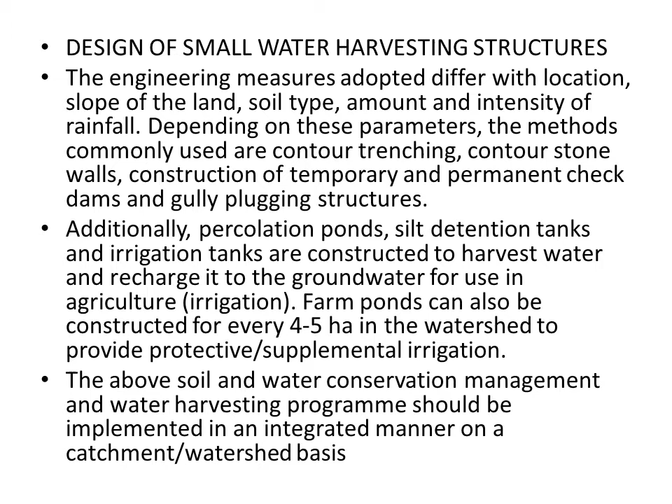Functions of the structures: contour bunds, contour barriers, contour trenches, and contour stone walls will not only prevent soil erosion but also obstruct the flow of runoff water. Consequently, the obstructed water will increase the soil moisture and recharge the groundwater in the area.

Check dams may be temporary structures constructed with locally available materials. The various types are brushwood dam, loose rock dam, and woven wire dam. The main function of the check dam is to impede the soil and water removed from the watershed. This structure is cheap but lasts about 2 to 5 years. The cost of the structure depends on the materials used, the size of the gully, and the height of the dam.

We can go for contour bunds, contour barriers, trenches, and contour stone walls to arrest soil erosion as well as the flow of runoff water, and consequently increase the soil moisture and recharge the groundwater. Check dams may be temporary structures like brushwood dam, loose rock dam, and woven wire dam. These are cheap but last only about 2 to 5 years.

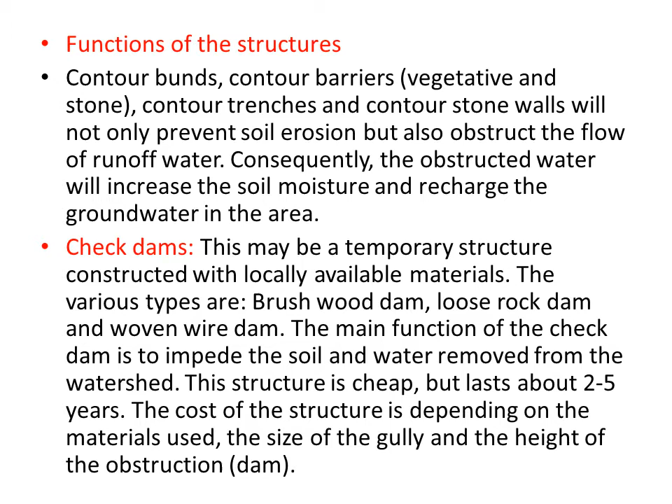A permanent check dam can be constructed using stones, bricks, and cement. Small earthwork is also needed on both sides. Cost varies depending upon the length and height of the dam. A little water is also stored above the dam, and this water recharges the groundwater. So we can go for permanent structures using stones, bricks, and cement, and the cost also varies depending upon the length and height of the dam.

The percolation pond is a multi-purpose conservation structure depending on its location and size. It stores water for livestock and recharges the groundwater. We can go for percolation ponds, which have multiple purposes: water can be stored for livestock as well as to recharge the groundwater. It is constructed by excavating a depression to form a small reservoir, or by constructing an embankment in a natural ravine or gully to form an impounded type of reservoir. So you can build it across a gully or a nala by putting an embankment to store the water.

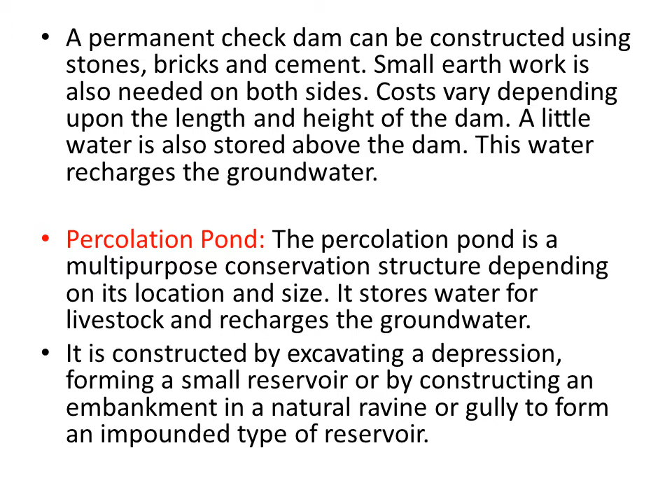Irrigation tank: the main function of this storage structure is irrigating crops. In Tamil Nadu, India, each tank irrigates from 10 to 5,000 hectares. In South India, there are about 20 lakh tanks irrigating about 3.5 million hectares. Earthen bunds are reinforced with masonry to collect and store rainwater for irrigation. The cost of this tank depends upon the size, location, and site conditions. Water from the tanks is normally used to grow paddy crops. So irrigation tanks are meant mainly for agriculture purposes, and in South India we have about 20 lakh such tanks irrigating about 3.5 million hectares. The cost of these structures depends upon the size, location, and site condition. They are constructed with earthen bunds reinforced with masonry to collect the water.

Apart from the above, to increase moisture availability to agriculture and tree crops, in situ moisture conservation techniques must be adopted in addition to the large-scale soil and moisture conservation and water harvesting structures in the watershed. We can also take up other techniques to increase the moisture of the soil, going for some small structures for agriculture purposes apart from construction of these large irrigation and percolation tanks.

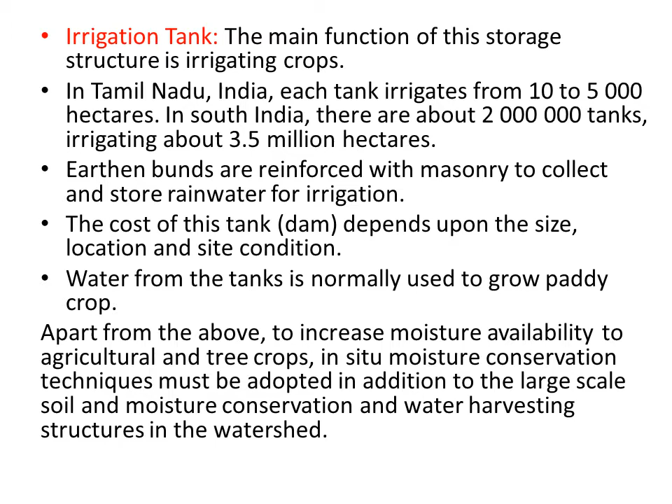These storage facilities and structures will attenuate and reduce the flood flow during storms. These measures will also ensure soil moisture and growth of trees downstream, recharging the groundwater in the region and making available more water for drinking and irrigation purposes.

Construction procedures: the procedure for the construction of tanks and check dams on a watershed basis involves first making detailed studies of the watershed to determine its current erosion condition, land use, and water balance condition before taking up the project.

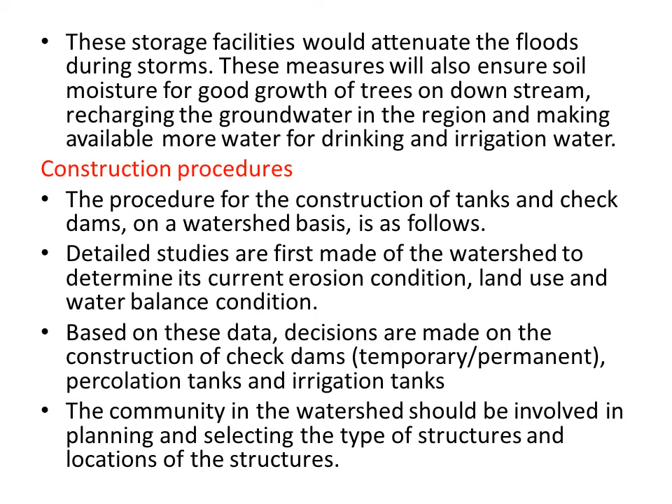If a large quantity of water is lost through runoff from the watershed, two to three percolation tanks or one irrigation tank can be planned based on the water availability.

A number of check dams can be provided to arrest erosion and to plug the gullies in the rivulets at appropriate places, or a series of check dams on the nala or gully can be constructed.

Construction can be done using human labor if necessary, or by a mix of mechanical and human effort. In India, these works are mostly executed by laborers to give employment to village people, with only 10% of the work done mechanically for digging foundations and excavating earth to form bunds. Otherwise, 80 to 90% of the work can be done by machines if employment is not a criterion.

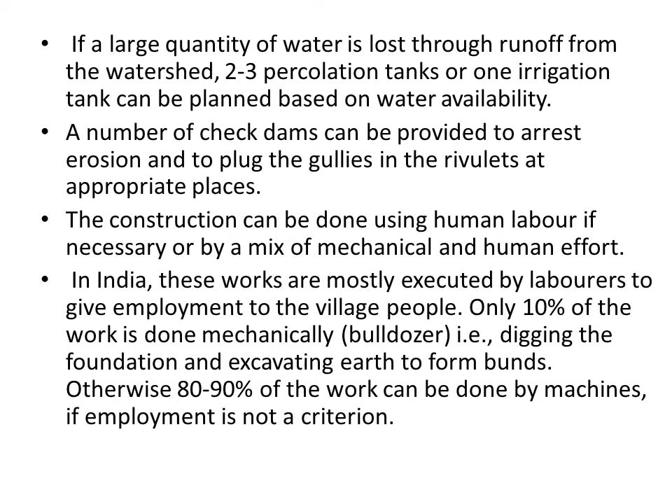Planning concept, design and construction of these structures: when selecting the construction site of check dams, percolation ponds and tanks, the following criteria can be considered.

Check dams are constructed across rivulets and gullies to control erosion, prevent gully formation, and arrest the flow of water to allow it to go underground. A number of such obstructions will be useful for soil and moisture conservation measures.

Inexpensive temporary structures can be constructed using vegetation, stone or brushwood available at the site. Large numbers can be provided to reduce erosion and gully formation. Permanent check dams can be located at the junction of one or two streams or gullies using masonry structures.

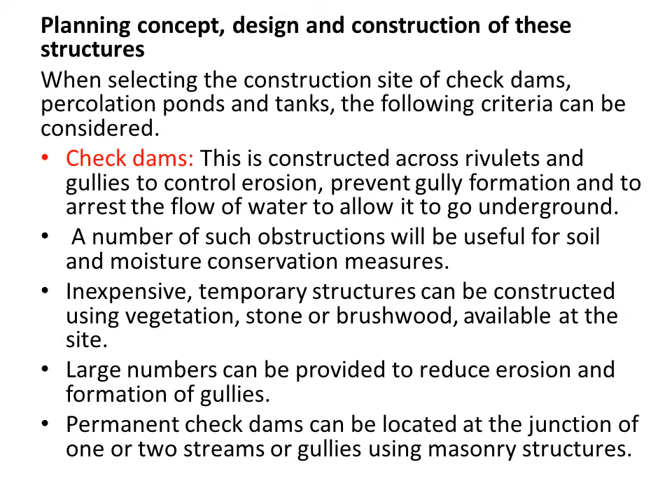For percolation ponds, the following factors may be considered: they should not be located on heavy soils or soils with impervious strata; the topsoil should be porous. Percolation tanks and ponds are meant for percolating water to recharge the groundwater or increase soil moisture, hence they should not be located on heavy soils or impervious strata.

Suitable and adequate soil should be available for forming embankments. The ideal location of a pond will be a narrow stream with high ground on either side, meaning a good valley-like location with a narrow stream. A simple, economic and efficient surplus arrangement should be possible.

When there is an excess flow, it should be taken out efficiently by providing waste-way structures or spillway-like structures. Pond size should be decided on the basis of the catchment area and the number of fillings possible for the pond, using the available water and the size of the catchment area.

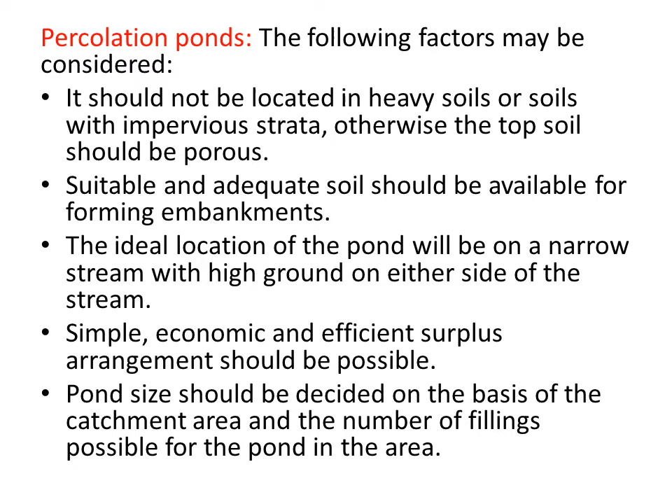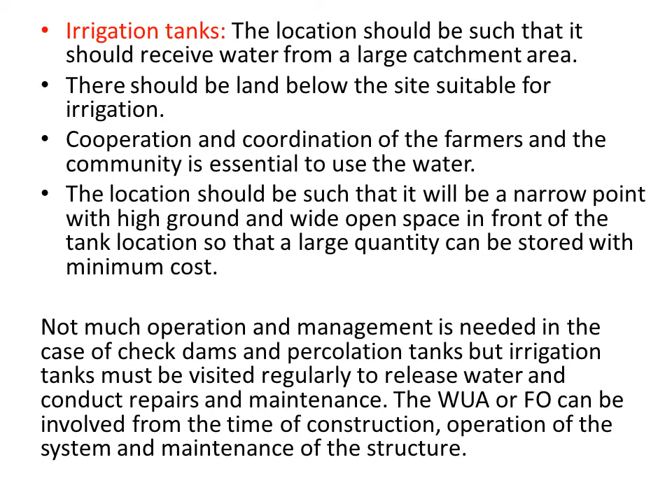We will go through examples of design of check dams, percolation ponds and tanks. The design procedure for the check dam, percolation tank and irrigation tank is more or less the same. In all three cases, the weir length has to be designed or calculated. So the design criteria for check dams, percolation tanks or irrigation tanks is almost the same.

We need to design a waste weir or surplus weir to carry out the excess water. In the case of percolation tanks and irrigation tanks, the capacity of the tank has to be calculated based on the rainfall and catchment area of the tank. For check dams, this is not necessary. For percolation and irrigation tanks, there is a need to work out the capacity based on the rainfall and the catchment area.

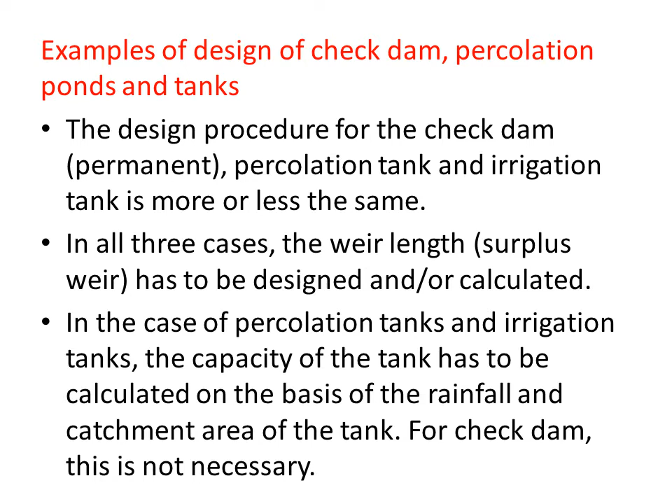The method of calculating the weir length and the capacity are the same in all cases. The procedure is as follows: select the site for the tank or check dam. Using the topo sheet or village map, find out the correct catchment area of the watershed at the location. Take the cross sections and longitudinal sections of the stream or gully where the tank or dam is constructed. Based on the levels taken, prepare a 50 centimeter contour for sufficient area to decide the water spread area and the capacity of the tank based on the yield of the watershed.

So the procedure involves identifying the location of the tank or check dam. Then, using the topo sheets, you find out the catchment area. Then you survey the cross sections and longitudinal sections to decide the capacity of the tank. You can go for 50 centimeter contours of that area to decide the water spread area and the capacity of the tank.

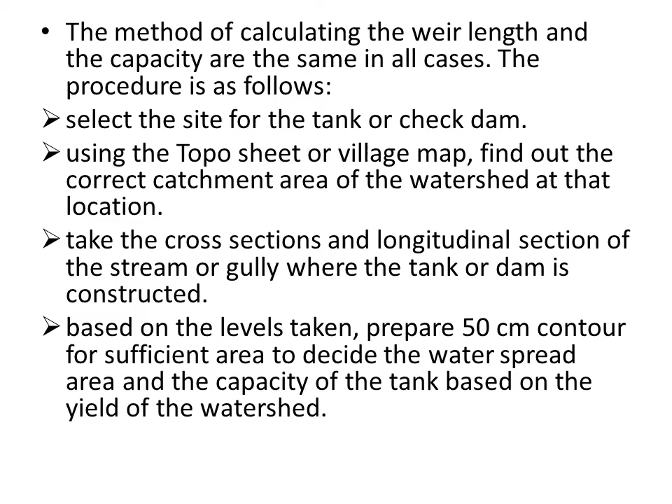We shall go through an example of a catchment area of 40 hectares where there is a rainfall of 625 millimeters, and the yield from the catchment, assuming the catchment is good, based on the tables available, can be calculated as 51,480 cubic meters of water runoff. Capacity may be designed as one third of the yield from the catchment, that is 17,000 cubic meters. So you have to design a structure to hold 17,000 cubic meters of water.

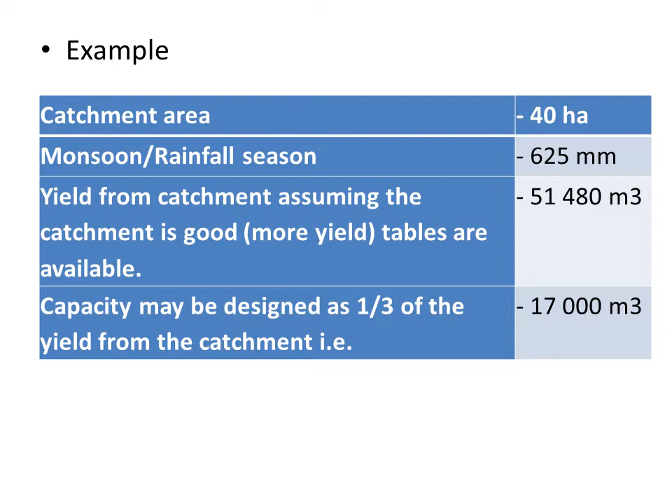Deciding the full tank level (FTL), maximum water level and tank bund level: from the levels taken, draw the contour lines at every 50 cm interval between the bed level and the highest ground level at the site. From these contour lines, the capacity of the tank at 0.5 meter, 1 meter, 1.5 meter and 2 meter height above the bed level is calculated. So we have to draw a contour map at 50 centimeter intervals from the lowest bed level to the bank level, and decide the capacity between the 0.5, 1, 1.5 and 2 meter level contours.

The contour at which the tank can store one third of 51,400 cubic meters, that is 17,000 cubic meters, is the required height for the weir. This is calculated as the full tank level. So we have to decide the full tank level, going by the one third capacity of 51,400 cubic meters, that is 17,000 cubic meters of water to be stored, and fix the contour level of the tank that can hold this water. This is called the full tank level.

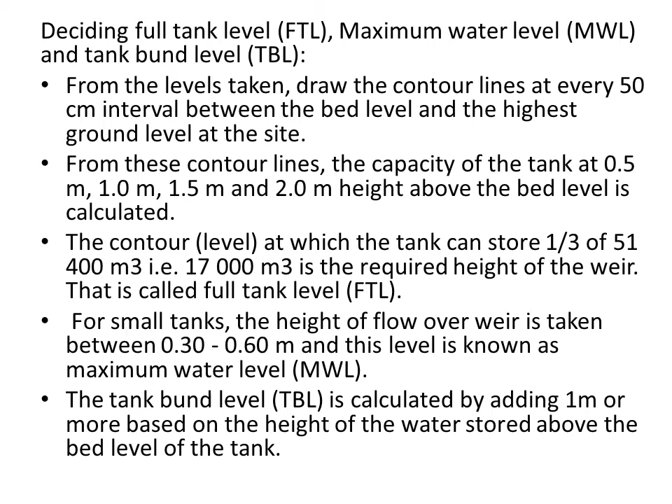So design of the weir, it is a waste weir. You calculate the maximum discharge in that nala or river portion using an empirical formula Q equal to CIA by 360, where Q is the discharge in cumecs, I is the intensity of rainfall in millimeter per hour, and A is the area of catchment in hectares, and C is a coefficient.

To decide the length of the weir, the formula used is Q equal to CL into H to the power 3 by 2, or which is 1.67 L into H to the power 3 by 2. For the broad-crested weir, C is 1.67.

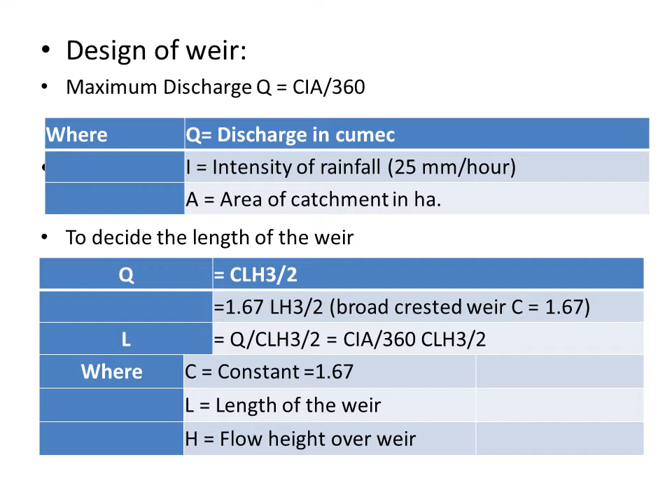Using this formula, you can find the length of the weir, L equal to Q by CL into H to the power 3 by 2, where C is a constant used as 1.67, L is the length of the weir, and H is the flow height over the weir, which is taken as 0.3 to 0.6 meter.

Farm ponds. Rain-fed agriculture constitutes over 55% of the net sown area in the country. The annual average rainfall of the country varies from 400 millimeter to more than 2000 millimeter, varying both in space and time. In low to medium rain-fed regions, the occurrence of high intense rainfall events with short duration is very common, causing soil erosion.

Basically, about 55% of the sown area in our country depends on rainfall, that is, rain-fed agriculture systems, and the rainfall varies from 400 to more than 2000 millimeter, varying both spatially and temporally. In low to medium rain-fed regions, high intense rainfall occurs in a very short duration, causing soil erosion. Hence, efficient rainwater management is necessary to improve water productivity and protect the natural resource base in rain-fed regions.

In such areas, it is very essential to have efficient water management and to improve water productivity and protect the natural resource. Farm pond technology has very good potential for implementation in different schemes of states or central government. Farm pond is the most important and promising technology in the integrated watershed management program, with other environmental benefits.

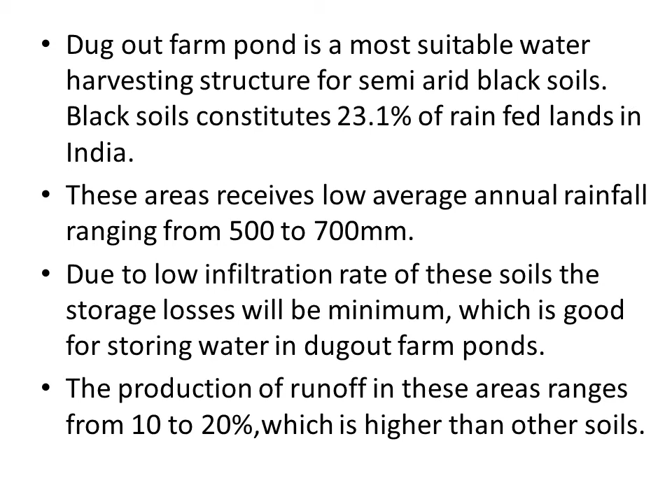Types of farm ponds: based on the method of construction and their suitability to different topographic conditions, there are three types of farm ponds. They are excavated farm ponds for flat topography, excavated-cum-embankment ponds for mild sloping topography, and embankment farm ponds for hilly and rugged terrain.

In black soil regions with flat to mild sloping topography, generally excavated type ponds are more suitable. So we have three different types of farm ponds depending on topographical conditions. Excavated farm ponds are for flat topography, where the ground is very flat you can go for excavated farm pond. Excavated-cum-embankment ponds are for mild sloping topography, and embankment farm ponds are for hilly and rugged terrain.

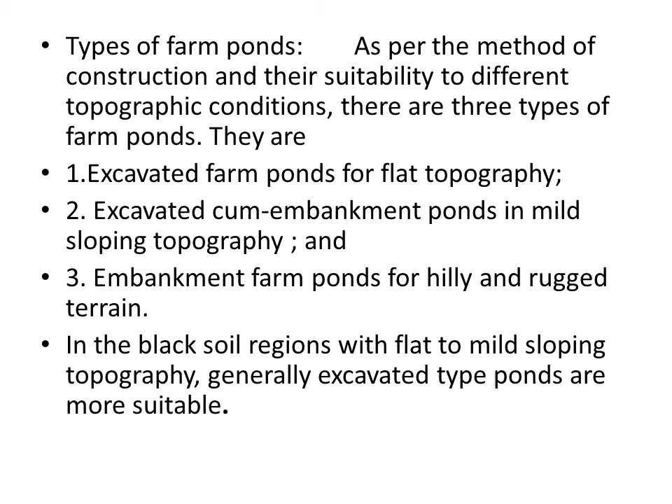Selection of site: the selection of site in a participatory mode depends on availability of a suitable site for pond location, farmers' willingness to part with a portion of land for pond construction and to share harvested water with neighbors, and optimum catchment size for considerable storage ensuring a long period.

These dugout type farm ponds involve the participation of the farmers because we have to choose or locate a suitable site for the pond location, and the farmer should have willingness to part from their land for construction purposes, as well as share the harvested water with others.

Well protected catchment for arresting rapid siltation. The catchment area should be well protected to arrest rapid siltation, so it should not get eroded. For that purpose, it should be protected with some vegetation cover or plantation of trees, etc.

While deciding the capacity, conservation measures such as agronomical and mechanical measures are considered. The command area near the pond should be free from salinity and alkalinity, and the site should require little or no land shaping around the pond, so one should not have to go for land shaping processes around the pond.

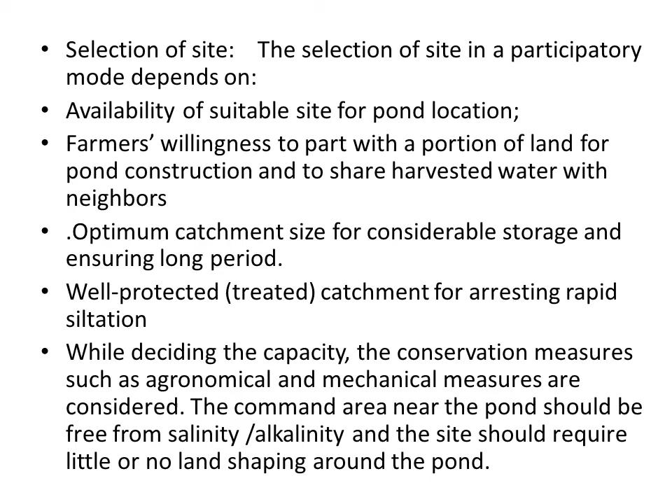Selection of the site for farm pond depends on local soil conditions, topography of the area, drainage capacity, infiltration, rainfall pattern, and distribution. Selecting the suitable site is considered one of the most important steps in planning for farm ponds. The following points may be considered for site selection within the farm area, with participation of the farmers to locate the farm pond site.

The following points are to be considered while selecting the site for dugout ponds. Observe the average slope direction in the farm area in which the farm pond is to be planned for construction.

If the slope is towards the left bottom corner of the field, a farm pond must be constructed in the left corner of the plot.

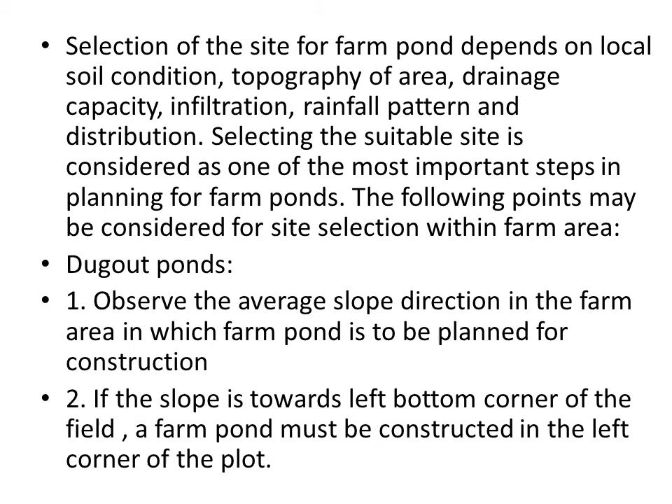If the slope is towards the bottom right corner of the field, a farm pond must be constructed in the right hand corner.

If the slope is towards the bottom of the field, a farm pond must be constructed at the corner of either side with a proper field channel at the bottom of the field connecting to the inlet of the structure, guiding water to the structure.

If the farm area has multiple slopes in different directions, a farm pond must be located in a portion of the area where water drains into the structure, possibly at the center of the field or near it, to suitably collect the water.

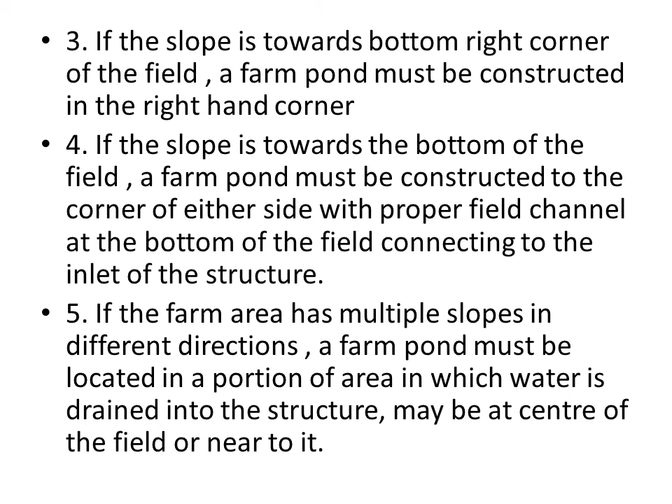For construction of a farm pond, the soil must have low hydraulic conductivity with minimum seepage and percolation so that water can be retained for a longer time in the farm pond.

Soils with low infiltration rate are most suitable for construction of ponds. Table 2 shows the infiltration rate for different soils. Black soil has good potential for rainwater harvesting without lining, as seepage losses are minimum, since black soils do not need lining to arrest seepage losses.

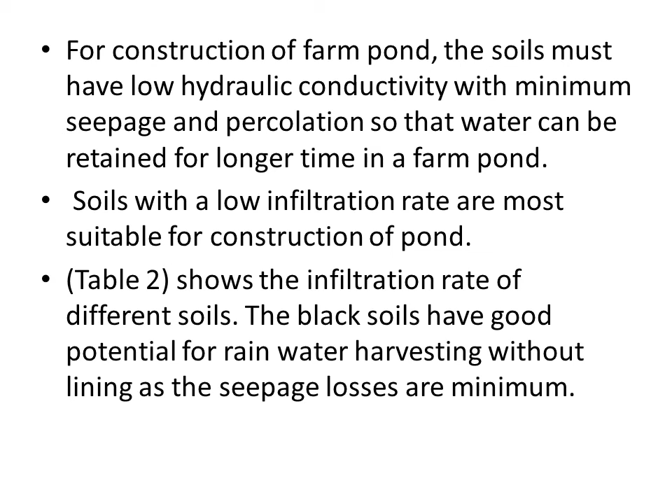Seepage losses are more in sandy soils and their mixed textures, and they require lining for storing water for more time. The following table shows different types of soils and their infiltration rates.

Coarse sand: 2 to 2.5 centimeter per hour. Fine sand: 1.2 to 2. Fine sandy loam: 1.2. Silty loam: 1. Clay loam: 0.8. Clay: 0.5. You can observe the difference between clay and coarse sand. Clay soils are best suited for the construction of farm ponds.

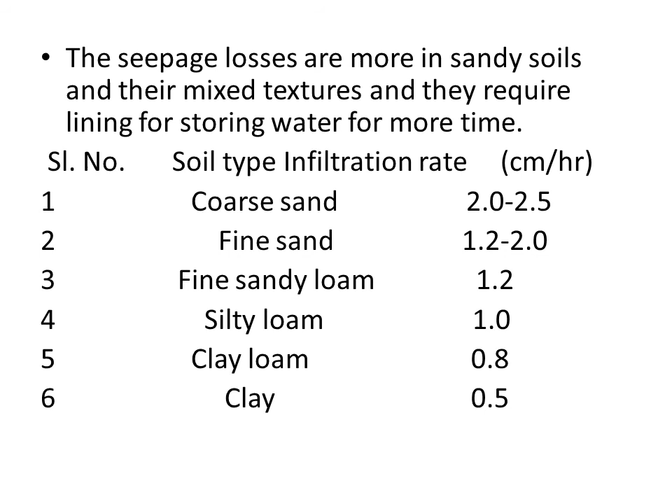Soil depth is important where rainwater harvesting systems are proposed. Deep soils have the capacity to store harvested water for a longer duration.

Soils having more than 1 meter depth are ideal for construction of farm ponds. The more the depth of the soil, the more the depth of the farm pond, which reduces evaporation losses from deeper ponds.

Topography: the topographic features of the farm catchment area may vary from place to place, and the proposed land for pond construction must have minimum earth excavation so that cost can be reduced with increased storage. We have to consider economy, looking at a topography where construction costs are minimum for storing the maximum quantity of water.

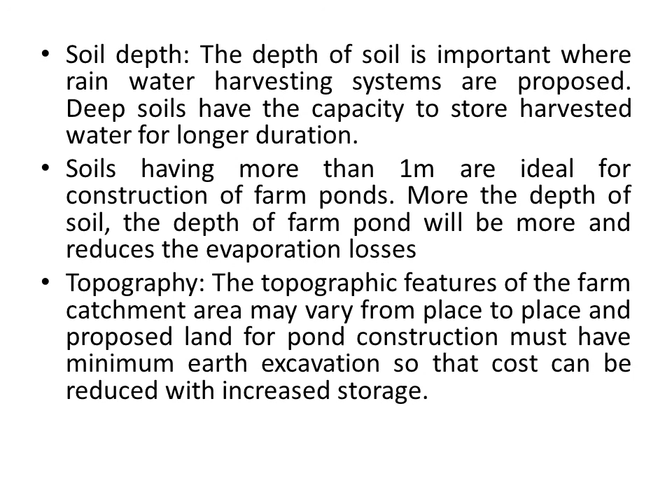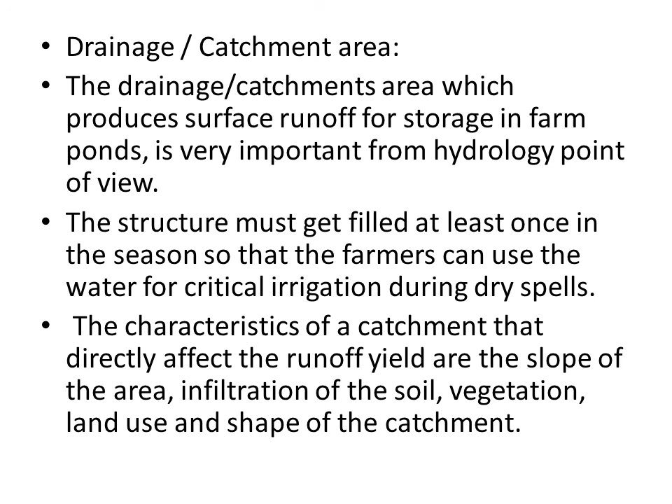We shall see the design considerations of farm ponds in the next class. Okay, thank you.